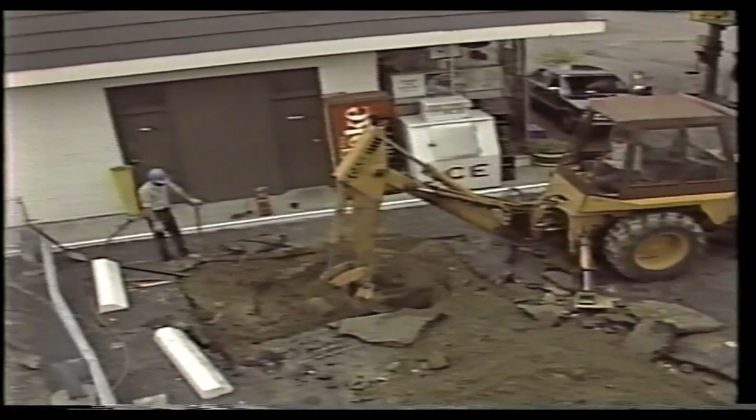These days, more and more underground storage tanks are being removed, or at least permanently closed in place. But unlike days gone by, tank closings now involve a certain amount of regulatory pomp and circumstance, procedure, paperwork, and often, as you will see, an element of danger.

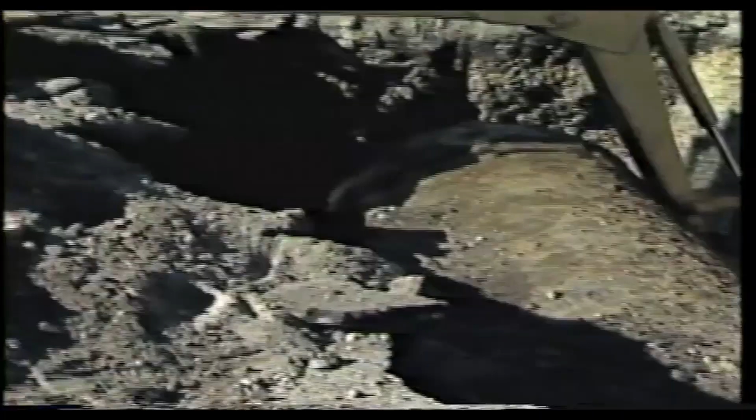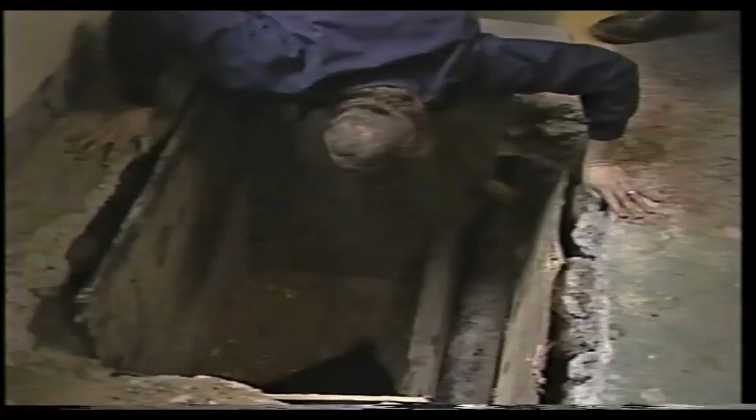Anytime that you're dealing with a flammable liquid, anytime that you're dealing with vapors that could cause problems, certainly even though a tank is empty, it still might be volatile. It still might have that capability of explosion. When it comes to tank closure, every site and situation is different. Most of these tanks store or have stored petroleum or other products that add an explosive dimension to the whole business. Some tanks that have been buried for 10, 20 years seem to want to stay put.

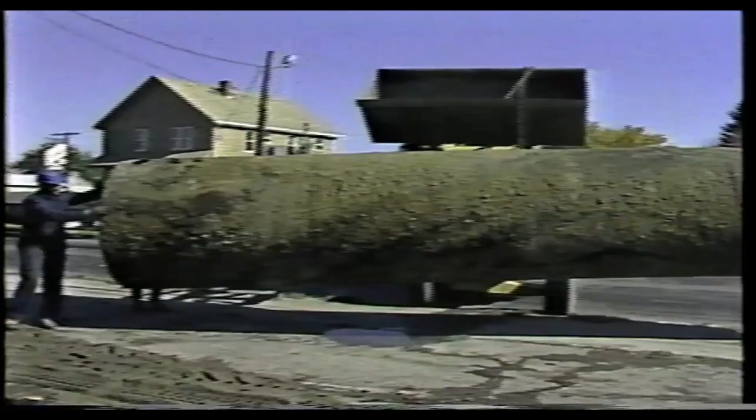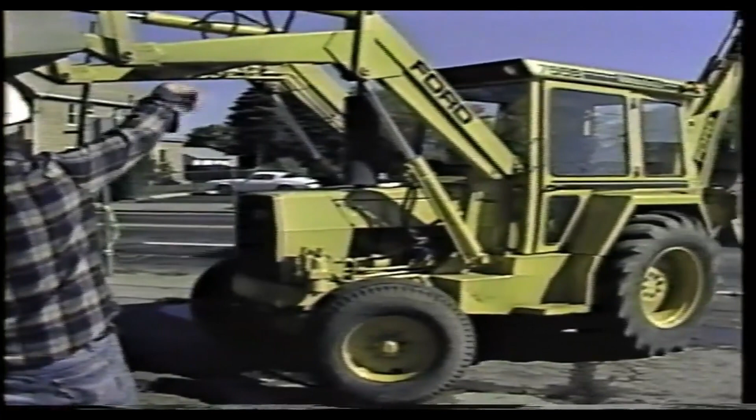Some days an inspector arrives on site and nothing is going right for the contractor. It's hot. They're struggling to get the tank out. Tempers are on edge. You may find yourself walking into a situation that just doesn't seem safe. Sometimes it looks like an accident just waiting to happen.

It was an accident that left 23-year-old David Stubbs of Biddeford dead and at least 3 others with injuries from burns to lacerations. It was just after 1 o'clock when an explosion rocked the corner of Cumberland and Washington Streets in Portland's Munjoy Hill. Workers from 2 companies were in the process of removing an underground gasoline tank from a station closed since December.

All I can tell you, sir, what I've told everyone else, there was just some sort of explosion. I was back to the tank. I dove immediately under the pickup truck and out the other side, and then when I turned around, of course, everything was aflame. Bomb dropped over here, you know. It's a big, huge explosion, a flash of fire, the concussion, the heat, everything just blew over this way. Lucky, I guess, that the station here didn't blow up, too, because we were pumping gas at the time.

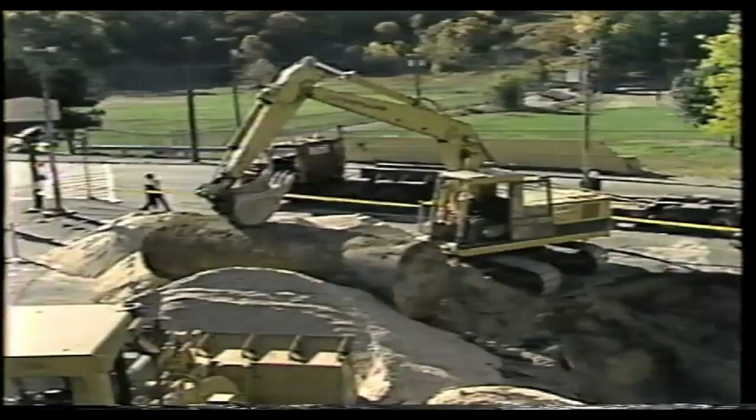Accidents, explosions do happen. In this accident, a man was killed when the end of a tank blew off. There are stories like this all across the country. Because you are dealing with explosive vapors, potential ignition sources, open pits, and other perils, environmental and fire inspectors need to be able to recognize potential dangers, to be able to red flag, even stop a bad situation.

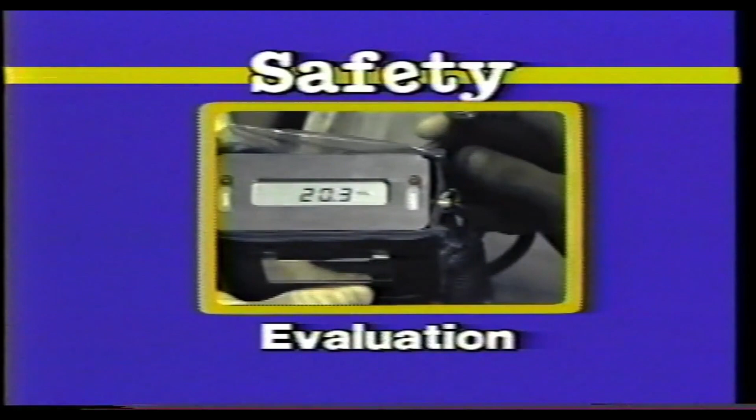In this video, we'll focus on the safety aspects of tank closure for both removal and permanent closure in place. Dealing with these tanks is an important job, and it can be done safely. You'll learn how to recognize and evaluate potential hazards and learn how such hazards can be controlled. In another video, we'll dig into the environmental aspect of closure, the inspector's field evaluation, to see if any contamination cleanup action is necessary. For now, let's look at safety and meet an environmental inspector who has presided over numerous tank yanks.

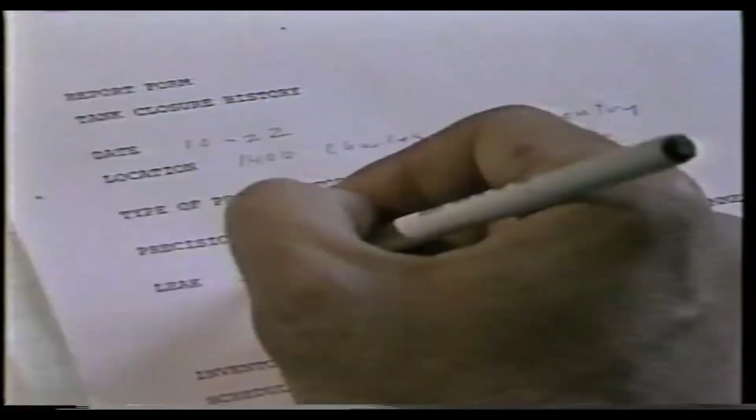Okay, where is this facility located? Okay. And what type of product is stored in the tank? I see. Was there a precision test run? I see. And what was the leak rate? Okay. Any inventory problems? Okay. Because of the leak, you must arrange to have that tank emptied immediately. Okay. When is the earliest time we can arrange for the removal? Okay, tomorrow. Very good. I'll be on site tomorrow. Be sure to notify the fire department or code enforcement official.

No matter which state or town you're in, this is the kind of information you need to be aware of before you hit the road to make an inspection. We want to see as many of the unprotected and unnecessary tanks out of the ground as possible. We inspect sometimes 2 or 3 tank closures a day.

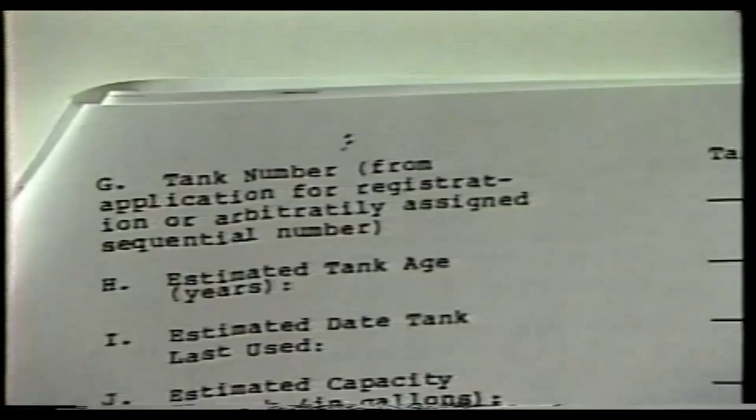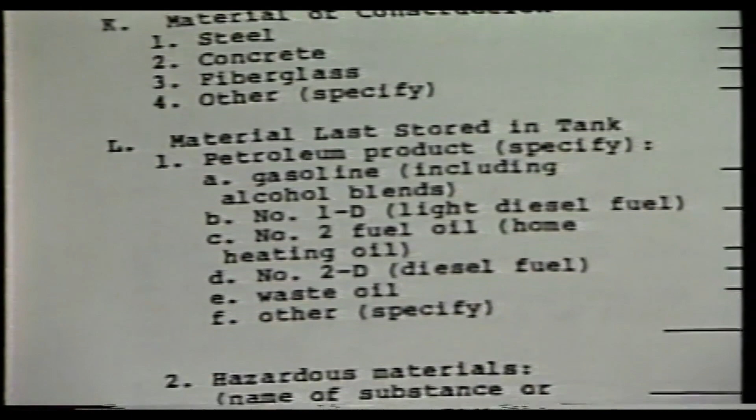To begin the procedure, the owner or contractor is required to fill out a permanent closure application, which asks a lot of questions about the tank, its age, capacity, material stored, how they plan to handle the tank removal, the disposal, and so on. It's important to discuss the procedure with the contractor over the phone so that he knows what to do before you get there, and he knows what you expect.

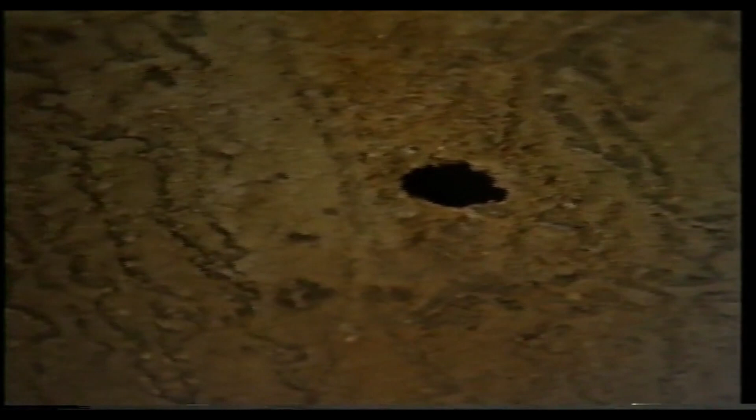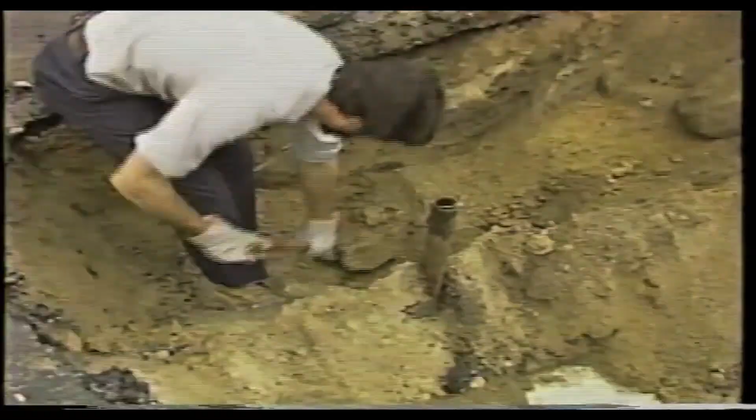For environmental agencies, the primary reason for doing this kind of inspection is to look at the tank, the soil, and check for any free product. But in doing that, you never know what you're going to find. Safe tank removal is the contractor's responsibility, but not all contractors know the score on this subject. So at least if an inspector understands why tank removal is dangerous and what procedures and precautions can make the whole business less dangerous, then he or she is in a position to throw out some helpful safety hints here and there. The biggest danger stems from those flammable and combustible liquids so commonly stored in underground tanks.

So let's take a few minutes to discuss flammable and combustible liquids and pick up some tips from an expert on the subject. Underground storage tanks are extremely dangerous. They're dangerous because of the flammable vapors that are present as a result of the previous product, such as gasoline, that was carried in these tanks.

To be safe in working with these tanks, you have to do three things. You have to recognize that there's a hazard, you have to evaluate it or measure that hazard, and then you have to take action to control it, which is to eliminate or minimize that. What you need to be concerned with in terms of what creates a fire hazard is called the fire triangle. It consists of three elements.

You need a fuel from the product vapors that are contained in that tank. You need oxygen, which comes from the air, and that supports the combustion. You also need an ignition source. If you don't have all three of these, you will not have combustion. The recognition, evaluation, and control of those three elements are what you need to concentrate on in order to make a safe workplace.

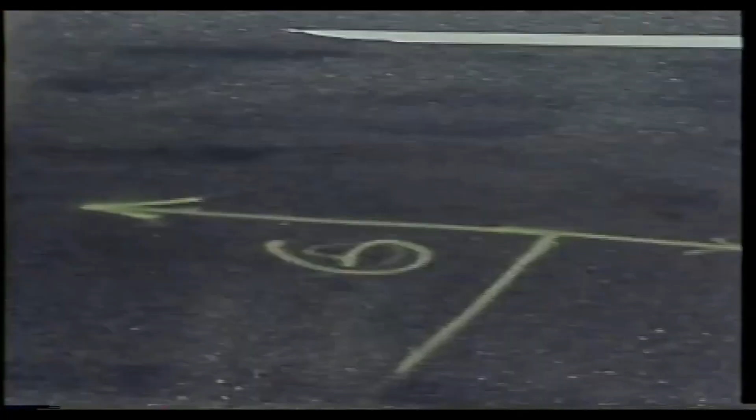While making an inspection, you want to see that the utility lines, gas lines, and water lines have been marked, and that the area has been roped off. You don't want backhoes ripping into the wrong things or pedestrians disappearing into places where tanks used to be.

We shouldn't have a problem with any of these utility lines coming in with this tank because we believe that it runs parallel with the road away from those lines. Yeah, we've got a good 6 foot of clearance, so I think we've got a safe location here. The tanks have been vacuumed. All right, we want to make sure, too, that when we start digging, we pile our spoil towards the street to protect ourselves from any vehicle traffic that might want to come in and get gas. Okay, I think we're all set.

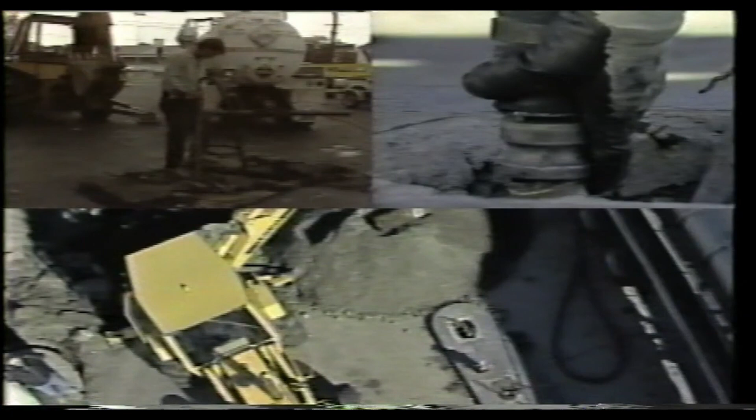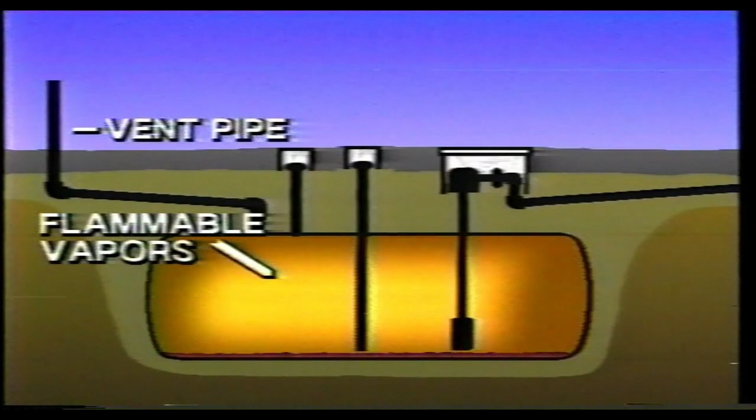Once you have a safe workplace, then remove any remaining product in the tank. Drain the product lines at both ends as they become accessible. Here is a fairly typical underground storage tank setup. However, for graphic purposes, the vent pipe is shown closer to the tank than it actually is. Once you've excavated to the top of the tank, remove pipe and pump appurtenances, but leave the vent pipe.

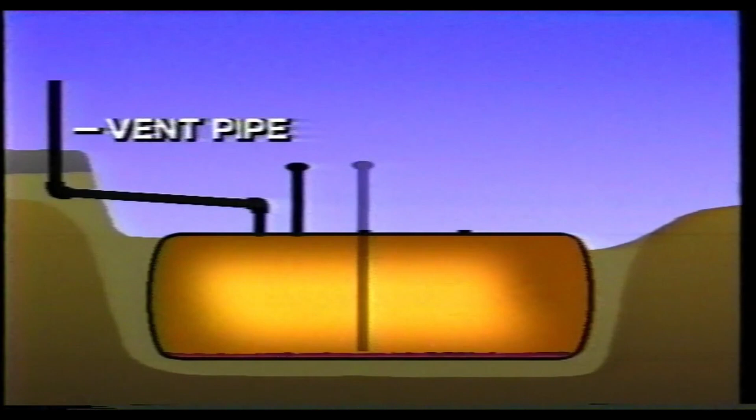The vent pipe should remain connected and free of obstructions until the air in the tank is safely below the flammable range. Once you have a safe workplace and the tank has been emptied, you can begin to deal with getting rid of flammable vapors in the tank before doing any work that could cause sparks and while the tank is still in the ground. This brings us back to the fire triangle.

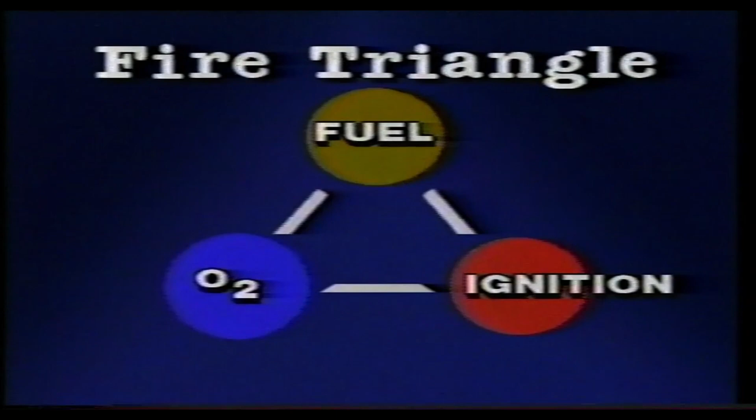In order for the contractor to effectively control the fuel side of the fire triangle, he needs to be aware that there is, for every product, a flammability range. What is this flammability range? It's the mixture of fuel and oxygen necessary to produce a fire or explosion when in the presence of an ignition source. That ignition source could come from a cigarette or the slightest spark or static electric charge.

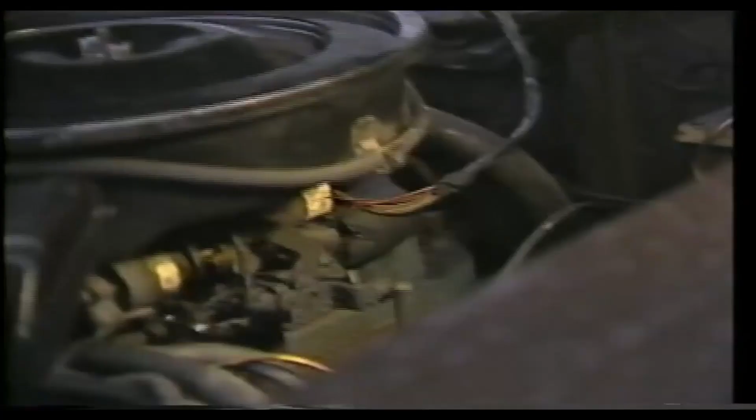For most petroleum products, the flammable range is between 1 and 10% concentration by volume in air. The flammable range for gasoline, for example, is 1.4 to 7.6%. Below 1.4%, not enough fuel is available to burn. Above 7.6%, the mixture is too rich to burn. Just like a car engine, if the mixture has too little fuel or too much fuel, there'll be no combustion. It's either too lean or too rich.

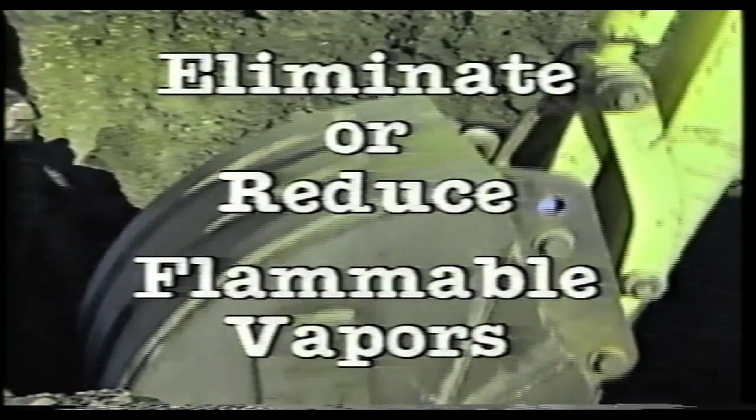So anyone in the business of handling tanks that have stored any kind of flammable or combustible liquid should know that they need to eliminate or reduce the flammable concentration in the tank before they start handling it. How is this done? The common practices for eliminating or reducing the flammable concentrations in the tank are purging and inerting. This is a subject that often seems confusing, but it's really a matter of thinking back to the fire triangle and of understanding whether you are dealing with the fuel or the oxygen side of the triangle, whether you're going to purge or inert the tank.

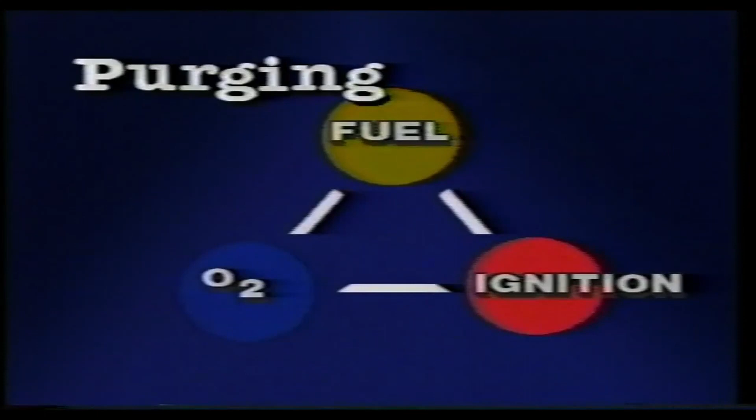It was quite a while before I ever realized that there was a distinction between inerting and purging, but the distinction is significant. Purging replaces the flammable vapors in the tank with air. No vapors means no fuel, which means no fire or explosion.

Inerting displaces the oxygen and some of the vapors in the tank with an inert or non-reactive gas, such as nitrogen or carbon dioxide. No oxygen means no fire or explosion.

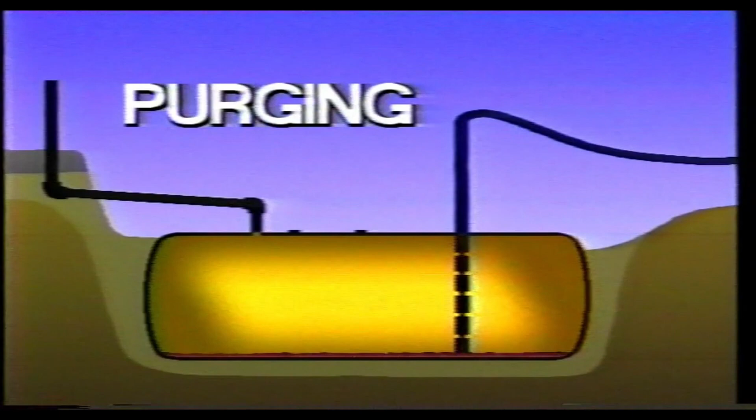Now, what about purging? When a contractor removes vapors by purging, he is ventilating the tank by either blowing air into the tank or sucking air out of the tank. This can be done by blowing the air in through a diffuser so the vapors are stirred up sufficiently to be moved out of the tank.

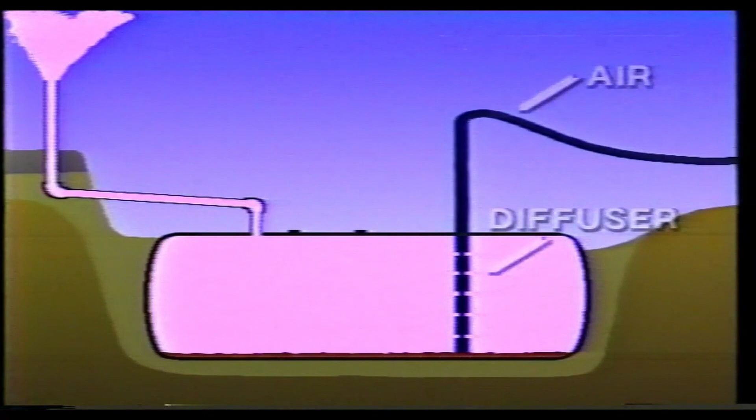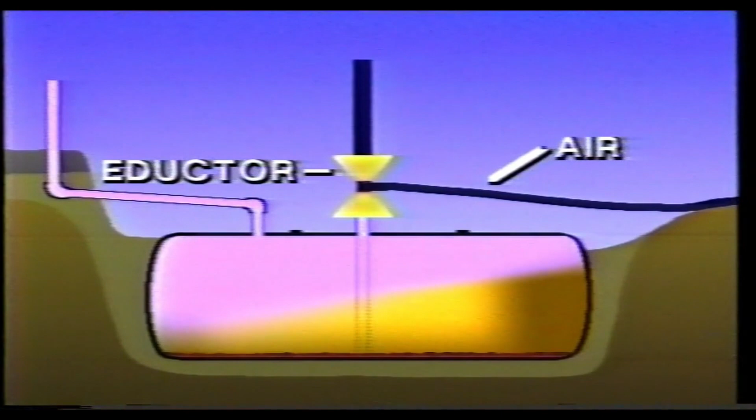Or by using a device called an eductor, which draws vapors out of the tank and draws fresh air into the tank. Be sure that when these vapors are vented through the eductor, they are discharged at least 12 feet above the tank. In any of these processes, dispersion of the discharged vapors is very important. Vapors must be safely vented up and away from the work area.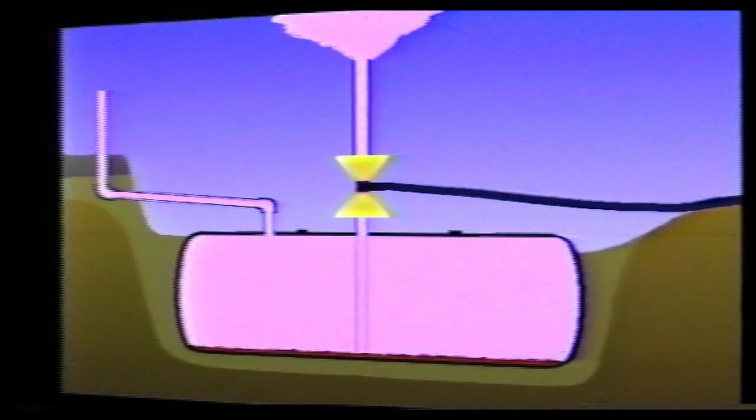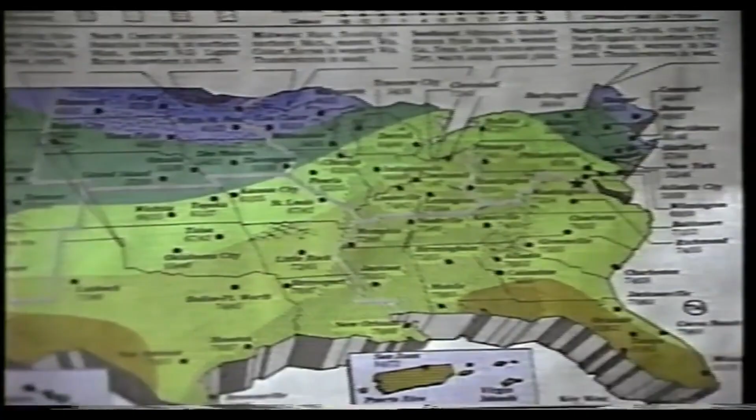Since the vapors are heavier than air, contractors should be monitoring the air both at ground level and inside the tank. In fact, there may be days, when it's hot and humid or when the wind is still, when the air simply won't disperse the vapors. So it makes good sense to put off working with the tank until conditions improve.

During purging, it is essential that you frequently monitor the concentration of the flammable vapors in the tank to be sure that your purging operation is effectively lowering the flammable concentration in the tank. To do this, you use a combustible gas indicator.

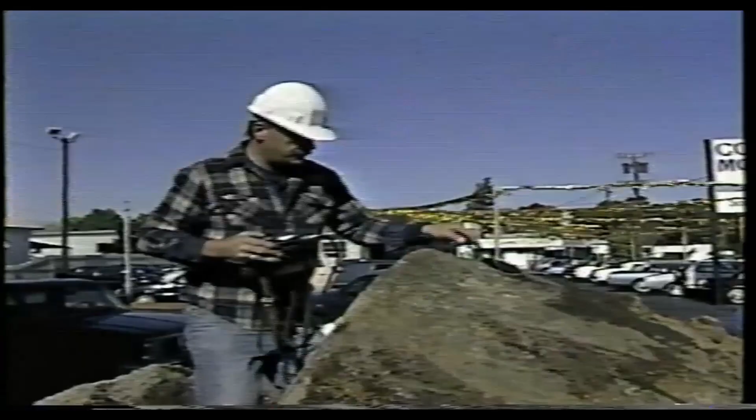And I'm not exaggerating when I say the combustible gas indicator, better known as the explosimeter, can be a lifesaver. The explosimeter measures the flammable concentration of the vapors in the atmosphere and gives a reading in terms of the lower explosive limit, commonly referred to as the LEL. The lower explosive limit is related to the lower end of the flammable range we mentioned earlier.

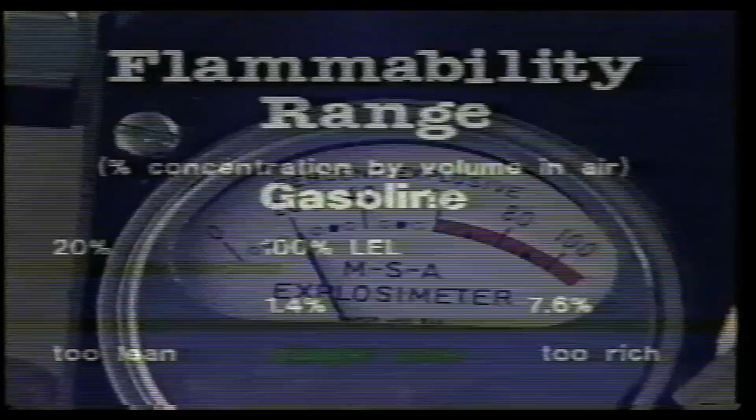During purging, you want to lower the flammable concentration in the tank to less than 20% of the lower explosive limit. In fact, some local codes play it safe and require a concentration of less than 10%. The explosimeter gives us an element of safety. It's our way of deciding if a tank is safe to be worked with or not. It's our barricade against an explosion. Okay, there's your basics on purging, getting the vapors out.

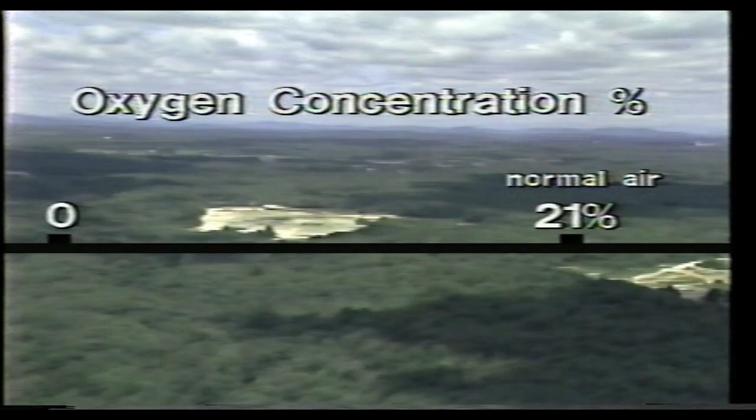Now, what about inerting? The objective of inerting is to lower the oxygen concentration to the level below which there is not sufficient oxygen to support combustion. In normal air, there is 21% oxygen. 11% oxygen is a theoretical limit below which combustion will not occur. The two most common inerting procedures use dry ice, which is frozen carbon dioxide, or compressed nitrogen.

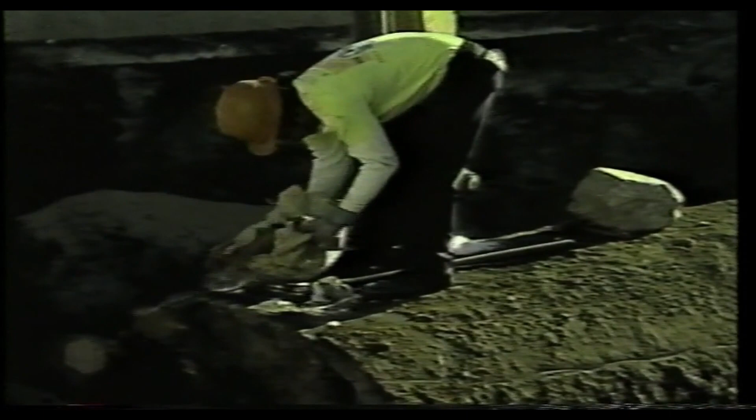When dry ice is added to the tank, it should be dispersed as much as possible. The dry ice goes through a transformation from a solid to a heavier-than-air gaseous form of CO2. This displaces the oxygen and some of the vapor product. Carbon dioxide is best applied as dry ice, a solid, rather than as compressed gas. The process of introducing bottled CO2 into the tank can create static electrical charges. You know, ignition sources. In other words, it's a lot riskier.

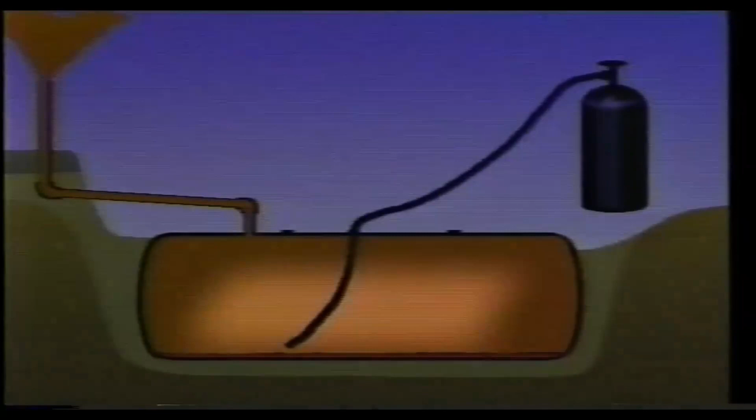Compressed nitrogen is an inert gas that is pumped through an opening in the tank and down toward the bottom so that it mixes and distributes throughout the tank. Inert gases should always be introduced under low pressure to avoid any generation of static electricity.

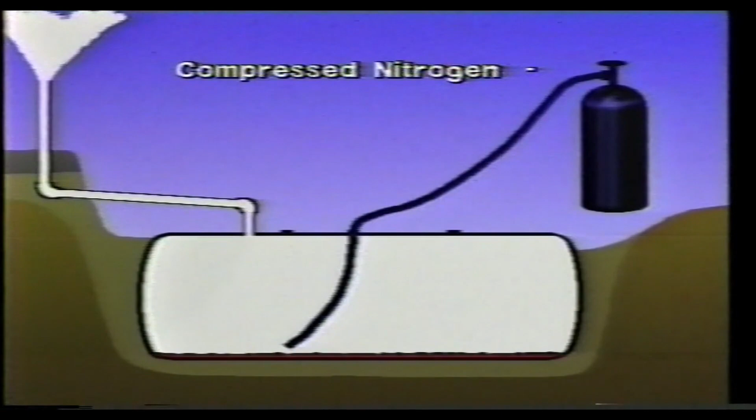To ensure that the necessary inert gas concentration has been achieved, the contractor should frequently test the tank atmosphere with an oxygen indicator. This instrument measures the amount of oxygen in the tank space. For inerting purposes, it should be calibrated at the lower end of its scale. Common practice is to get the oxygen down to 8% or lower to play it safe.

Due to the lack of oxygen, an inert tank should not be entered unless specific safety precautions are followed. Even in the best of circumstances, tank entry is dangerous business. So, that's inerting, replacing oxygen with a non-reactive gas. And the purge replaces the vapor with air.

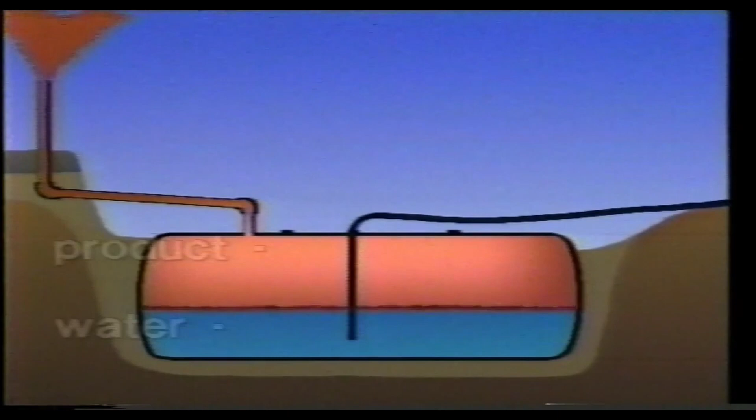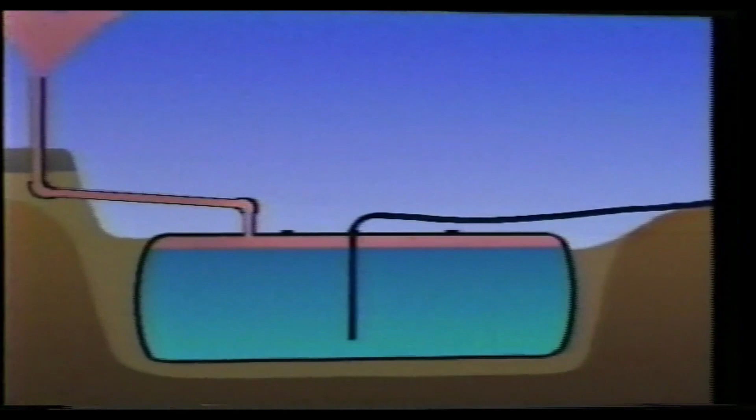Water can also be used to remove oxygen and vapors. The residual product floats to the top and is pumped off. The water must then be pumped from the tank and disposed of properly. And this can sometimes be a nuisance and not too practical for larger tanks.

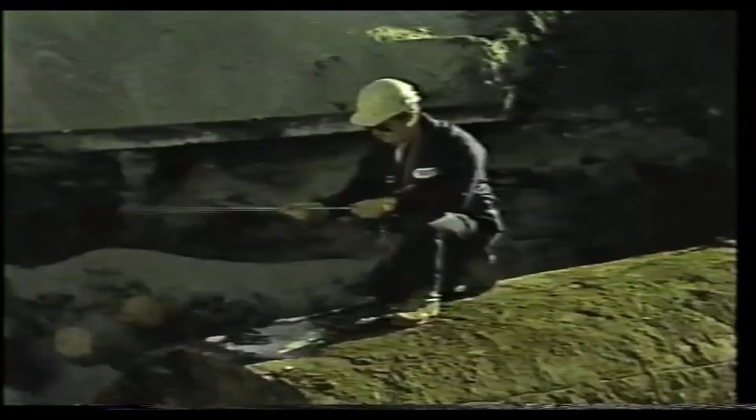As you can see, there are a variety of ways to make a tank safe to work with. Which of these methods is best? Now that seems to be a matter of personal preference, convenience, or local tradition. The important thing for you, the inspector, is to be able to recognize potential hazards no matter which method is being used. Also, for any of these methods, in-tank readings for vapors or oxygen should be taken at the bottom, middle, and upper portions of the tank.

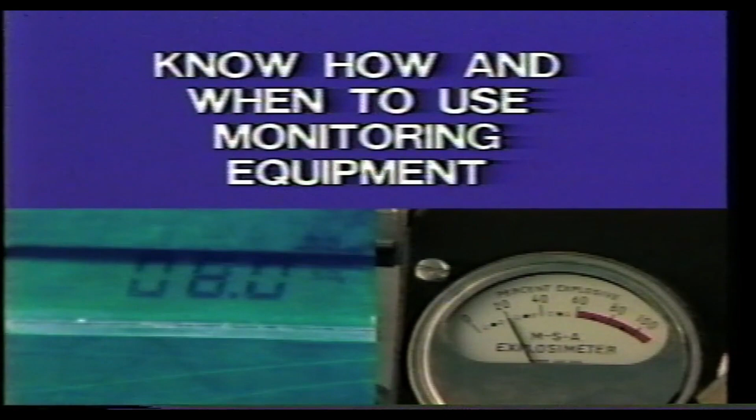And instruments should be cleared in clean air after each reading. It's important that contractors understand how and when to use these monitoring instruments. Always keep in mind, any vapor-freeing technique is temporary. The sludge and residues in the tank continue to emit vapors. Never take it for granted that the tank is vapor-free. The rule to remember? Test frequently.

This subject may seem complicated. That's why we have a companion booklet to this video that you might want to check out. Anyway, once the tank is safe and you can bring in the heavy equipment, then that vapor-generating sludge needs to be cleaned out. The big sticky wicket in tank removal is the sludge and scale remaining in the tank, the residue that stubbornly hangs in there, lingering on as a source of continuous and dangerous vapor regeneration. A 5,000-gallon tank, for example, may well have 5 to 10 gallons of sludge remaining in it.

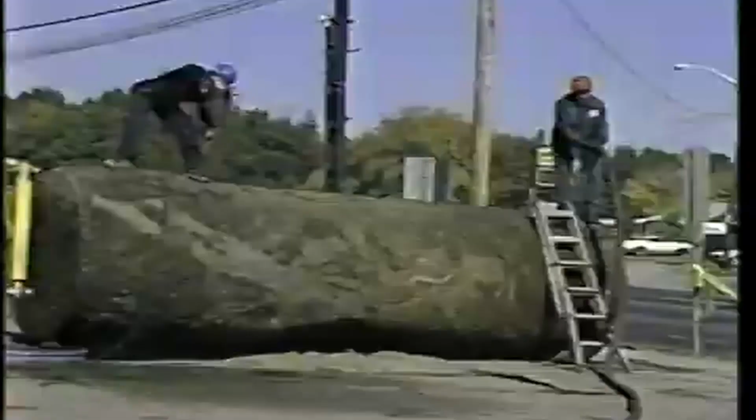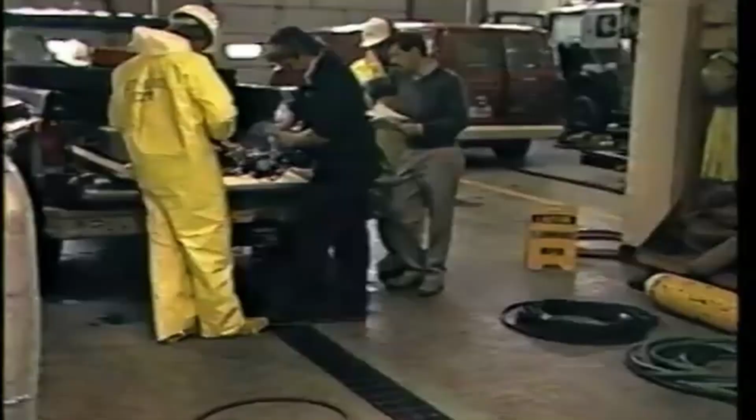Ideally, a tank should be cleaned on-site. But this is more or less a risk assessment based on physical surroundings, population in the area, and the weather conditions that day. Of course, it also depends on whether or not the tank will be closed in place. And it also depends on local regulations. You should always check on specific state or local requirements for any of this tank removal business.

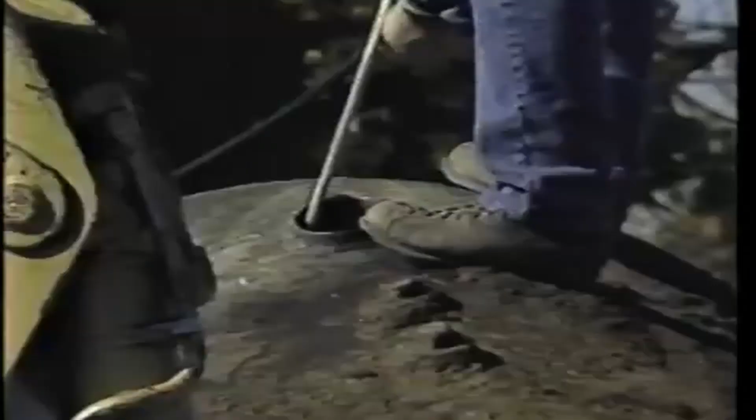If the tank is being removed, the contractor has the option of trying to get at the sludge by tilting the tank so it can be rinsed down to one end and pumped out. If the tank is to be closed in place, the contractor may add rinse water to dislodge as much sludge as possible. In either case, they should visually inspect the rinsed tank and again test for vapor or oxygen levels, because sometimes the sludge is really caked on and needs more serious cleaning. The important thing is to get the tank as clean as is safely possible.

The contractor should test the tank space prior to entry, continuously ventilate the tank to provide sufficient oxygen, and provide respiratory protection to avoid breathing toxic or noxious fumes. And remember, keep testing. You want your buddy in the tank to come back out in good shape and good spirits.

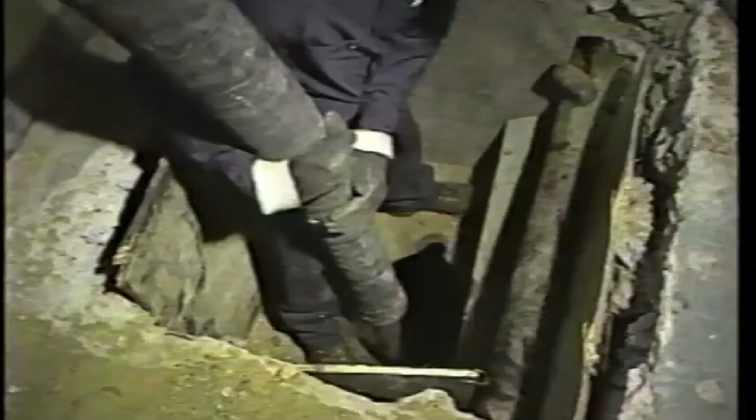If the tank is to be closed in place after cleaning, the tank should be evenly and completely filled with a solid inert material such as sand or concrete. Plug all openings and disconnect and cap or remove the vent line. Remember, the tank that is properly closed in place should pose no future environmental or safety threat. And again, check on local regulations.

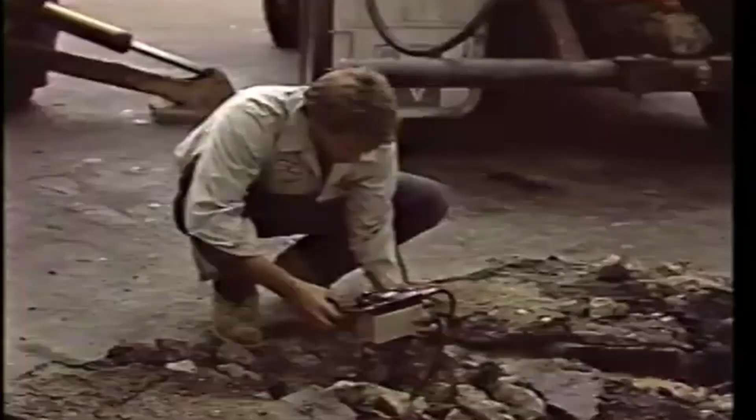So, as far as making a tank safe for handling and cleaning goes, as an inspector, you want to be sure the contractor is familiar with proper purging and inerting procedures, and that he is routinely monitoring for vapors. The bottom line for all of this is, you've got to think safety while making an inspection. When I make an inspection, I always bring along a hard hat to play it safe, and an explosimeter in case I need to check for dangerous levels of vapors in the air.

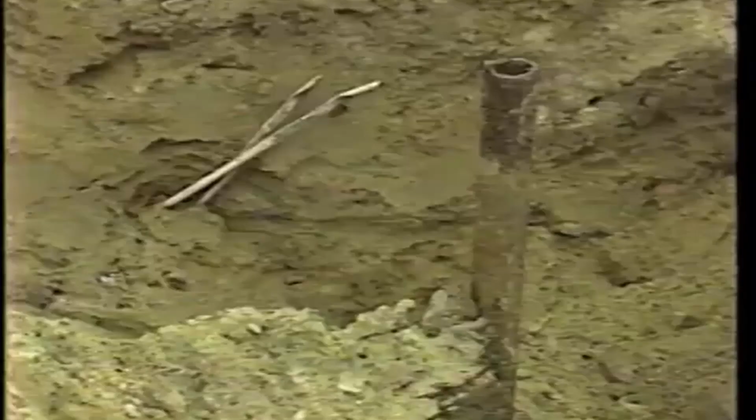Some contractors will tell you how they have never had an accident, and that too many precautions mean time and money. But when you get right down to it, ultimately, the cost could be much greater. As an inspector, you get to know the different contractors. It helps when you're both working toward the same goal, a safe and environmentally sound tank closing. Many contractors are right on top of the situation. They know what to do before I even tell them.

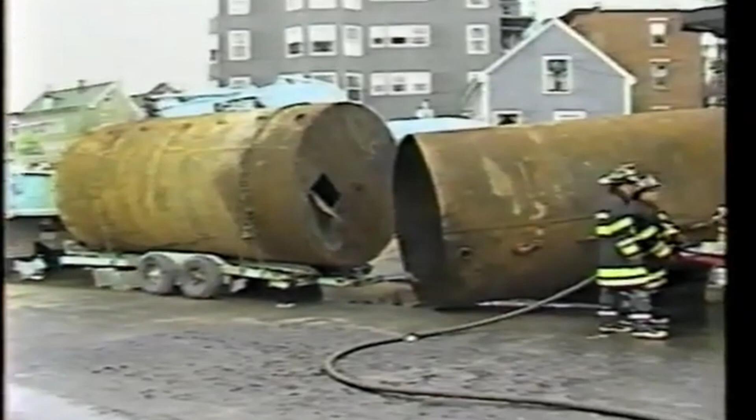Because of the nature of tank removal work, there are other inherent dangers that the inspector should keep in mind. For example, the weakest point of a steel tank is its ends. If there is an explosion, the end is generally the first to blow, so it is best not to linger at the ends while inspecting. Make sure the tank has been securely blocked. Stand at the end of an excavation, not the sides. This way you won't be in the path of the machine's arm swing, and a cave-in is less likely from this point. Why push your luck?

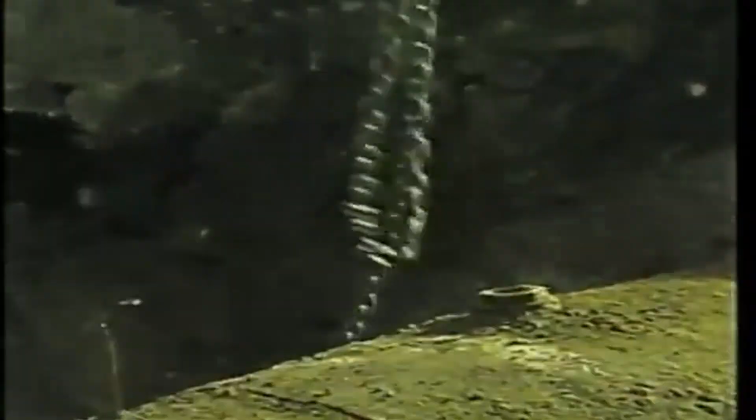And while the tank is being pulled out of the ground, stand out of the way. It's not at all unusual for a cable, chain, or piece of lifting equipment to snap and fly out in any direction. You can never be too careful as far as safety goes on any of these sites. You've got to protect yourself from the general public as far as vehicle traffic, pedestrian traffic. People are very inquisitive. They want to come over and see what you've got going. Sidewalk superintendents, and they could have a cigarette. They could stand on unstable soil and the hole could cave in.

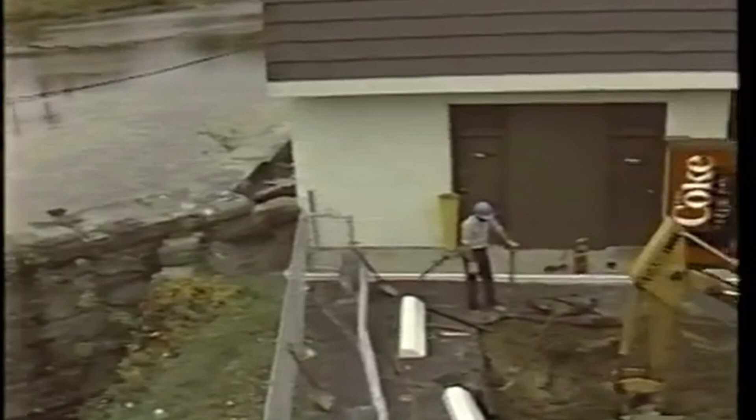Once the tank has been exposed and unearthed, you may notice that the tank has leaked. In this case, you've got both an environmental contamination and a safety concern. Here again, our job is to look. Our job is to snoop. Our job is to do a good inspection to see, to make a determination, did indeed this tank leak? Because if this tank leaks, where did it go?

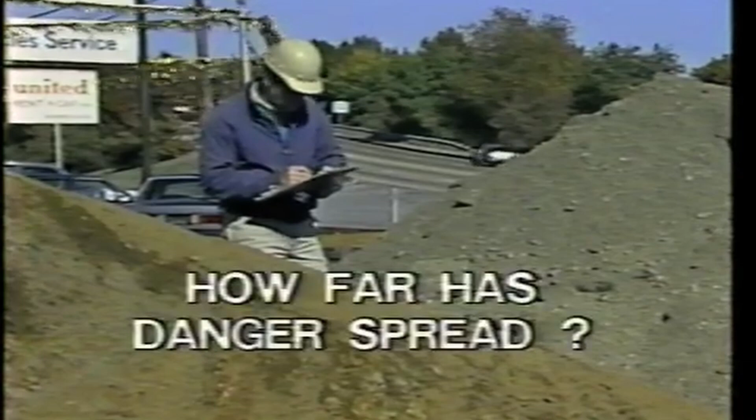Then we must begin to think of perimeter. How far did it go? Did it enter somebody's basement? Is it in somebody's sump pump? Where did it go? You've got to look around. Check your notes. Where are the storm drains, sewers, houses? Is there a potential for an explosion? If this situation arises and you're an environmental inspector, call the local fire department.

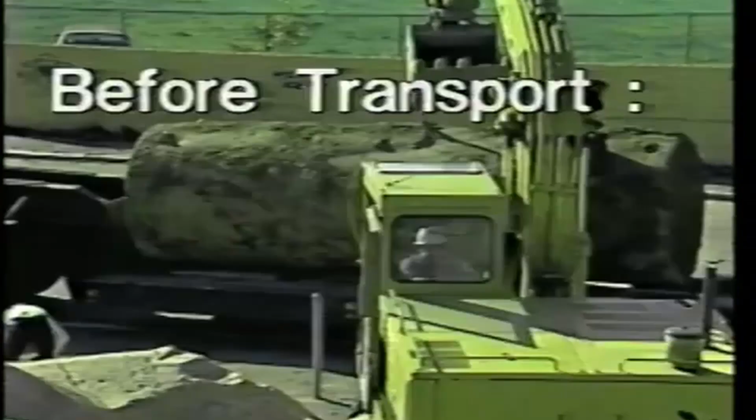Once an exhumed tank is ready to travel, it should again be tested, appropriately permitted or labeled for transportation, and all the holes should be plugged or capped, except for one 1/8-inch vent hole at the top for pressure relief. Remember, if you've got wind whistling through an inerted tank, you could reintroduce an explosive atmosphere.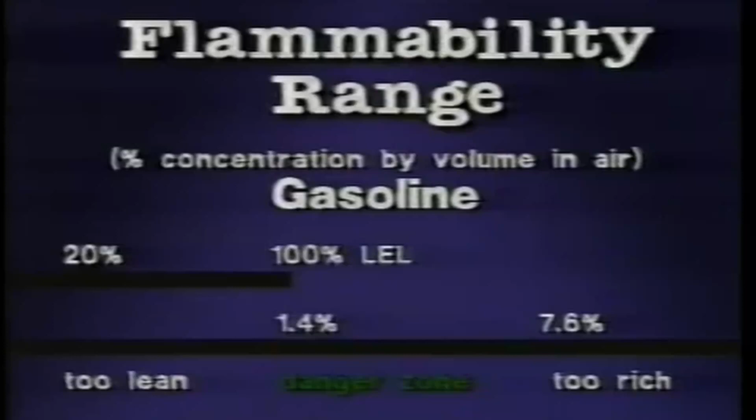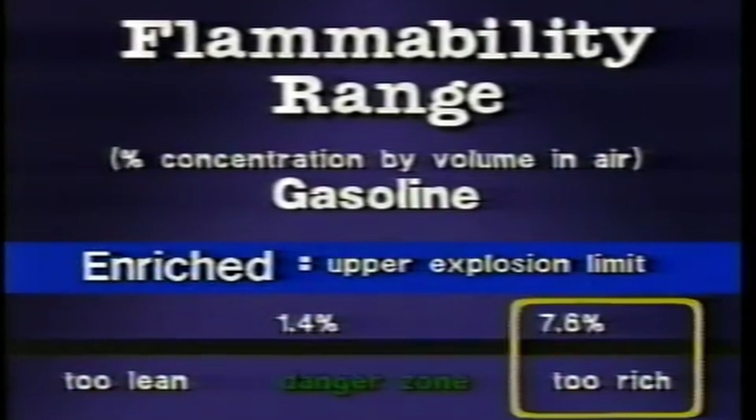Most contractors choose to transport only inerted or purged tanks. However, some choose to transport tanks in an enriched or too rich condition to a remote site for further handling and cleaning. This practice has some serious safety considerations, so check out the regulations on this with your local fire department or state transportation authority.

When our contractors come to us, we ask them very, very clearly, what are you going to do with these tanks? And the people that we are working with today have a safe area to take that tank. They understand that that tank could be an explosive device. In most cases, a tank should not be reused. So I want to know about the disposal plan.

Ideally, the tank should go to a scrapyard where it can be cleaned, if it's not already clean, and it can be cut up safely for recyclable scrap. Of course, in many parts of the country, it's hard to find a place to dispose of these tanks. It's a big problem. We're in the tank installation and tank removal business, and in doing so, it became a well-known problem, and a great problem for us. And what do you do with these tanks? Where do you dispose of them?

We saw problems being created where they were being dropped in farm fields, and they were creating contamination in creeks and brooks. We decided that we would approach it from an environmental standpoint and set up a disposal yard that could properly handle the contamination within the tanks and safely handle the cutting of the tanks.

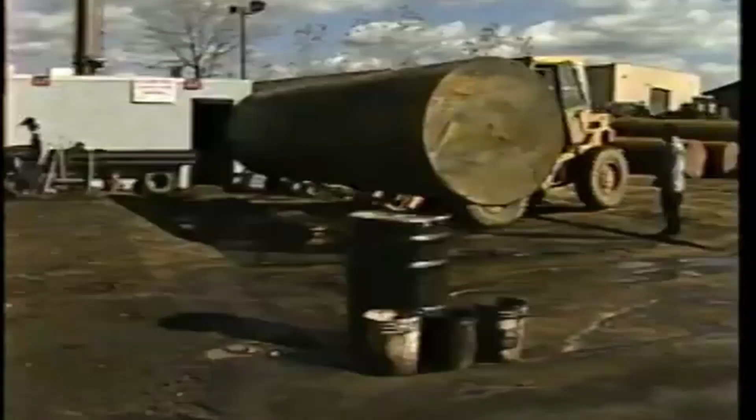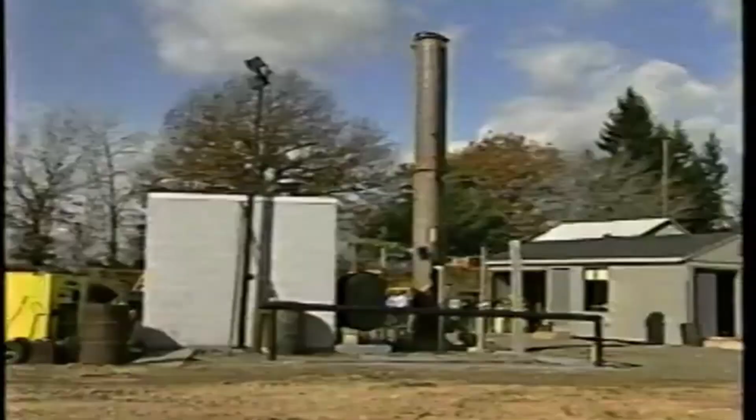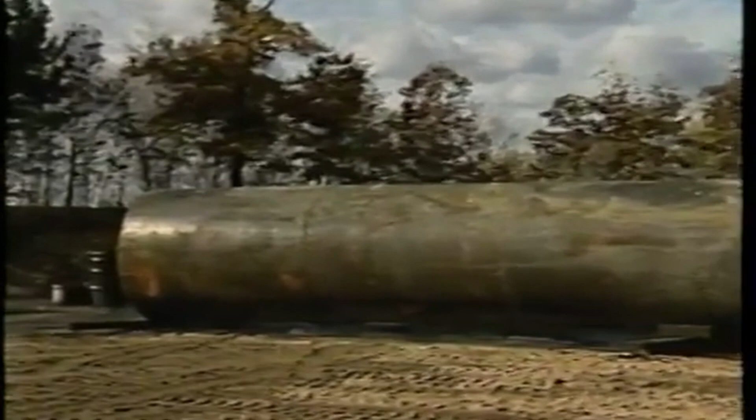A tank comes in, it's unloaded, it's cleaned, the residue from the tank is processed through an underground system. It's taken through a series of pits, tanks, pumps. It's finally taken and put through an air stripper for the final process, then put into a fiberglass 10,000-gallon tank. It's batch tested, and once it meets the requirements of our discharge permit, it's then discharged through the sewer system to the local treatment plant.

Well, there you have some of the ups and downs of tank closure. You want to do a preliminary history on the tank and the site. Think safety while you're walking around the site. Know when to stop a bad situation. Make sure the contractors know how to handle their vapors safely.

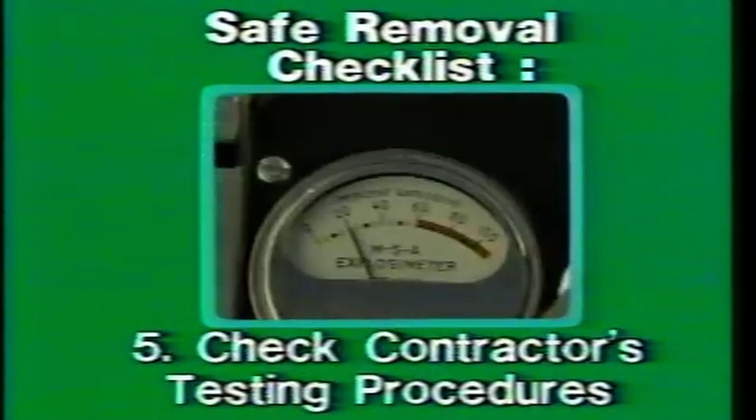Remember, we have covered petroleum products in this video. Chemical tanks may require special handling. Be sure the contractor knows how to handle the product in the tank he is removing. Be familiar with the use and the need for vapor and oxygen monitoring equipment. Know when to call in other experts, and find out how the tanks will be disposed of.

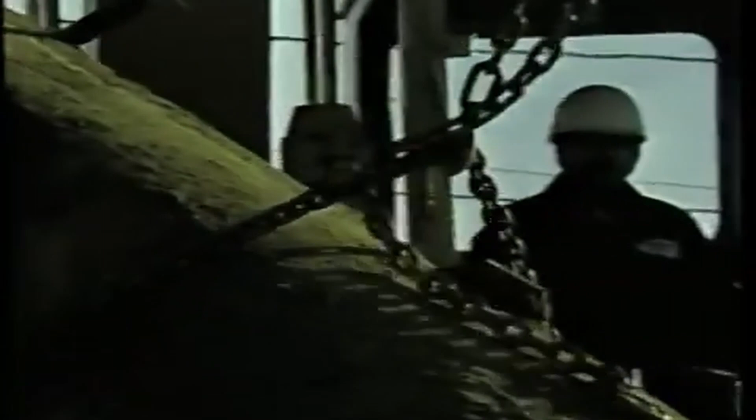Yep, tank closure has its share of potential perils and pitfalls, and no question about it, you've got an important job. Throughout the country, more and more tanks are being removed or closed up. Accidents are happening. Lives have been lost. All it takes is that certain combination of fuel, oxygen, and an ignition source. As an inspector, you don't need to go out and be a hero, but some words of wisdom from you could help make these jobs safer for everybody on the scene, including yourself.

Right, Peter? Right. It's a tough job, but somebody's got to do it.

We've presented a lot of material in this video, and if the subject matter is new to you, you might want to rewind and watch it again. Or you might want to check out other resources such as Tank Closure Without Tears, an Inspector's Safety Guide, a companion booklet to this video.

The API's Recommended Practices 1604, Removal and Disposal of Used Underground Petroleum Storage Tanks, API 1631, Interior Lining of Underground Storage Tanks, API 2015, Cleaning Petroleum Storage Tanks, and NIOSH's Criteria for a Recommended Standard, Working in Confined Spaces.